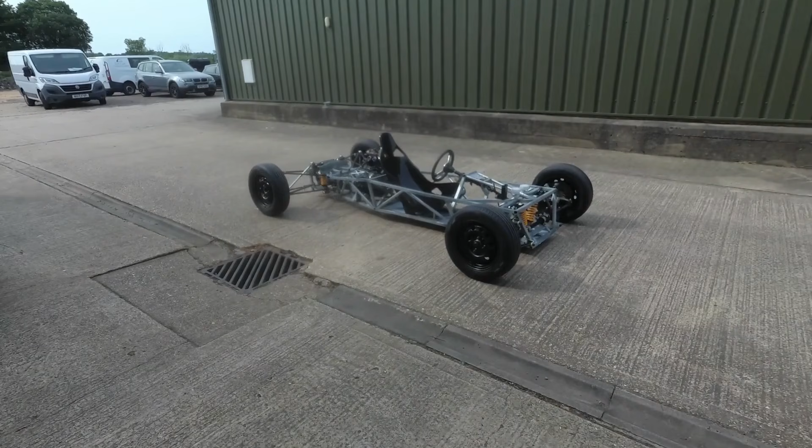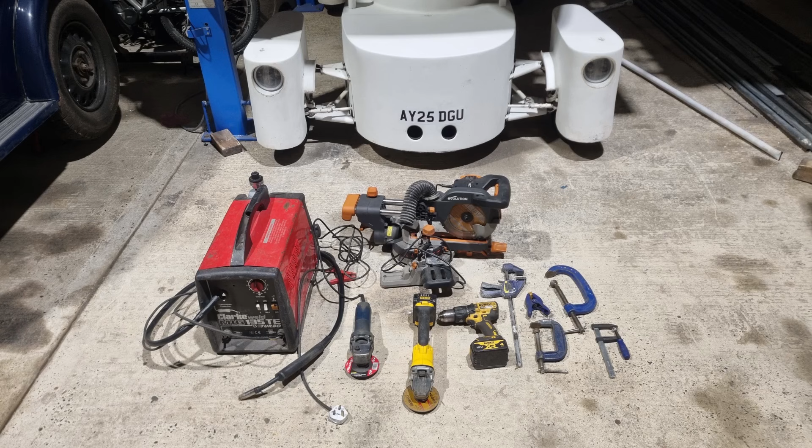In this episode, we're going to start building the chassis by fabricating the front panel, as well as the rear subframe. These are a good starting point, as it doesn't require a large amount of space or money to make them, and is a good lesson for beginners in marking, cutting and welding steel tubing. The tools used are a MIG welder, a chop saw, angle grinder and various hand tools.

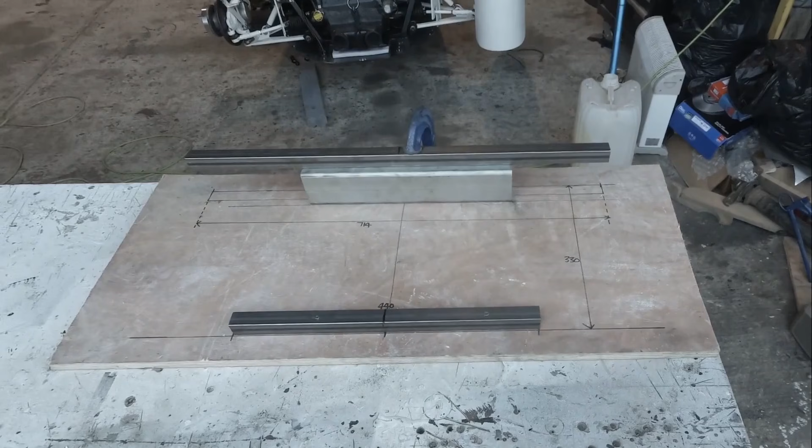For this stage, a very simple jig can be made to hold the tubes in position. One piece of 25 by 25 tube is cut to 440 mm and one to 714 mm. The tubes are placed 330 mm apart from outer surface to outer surface, and the longer tube is raised 75 mm above the work surface. The tubes can be clamped in position or drilled and screwed to the work surface.

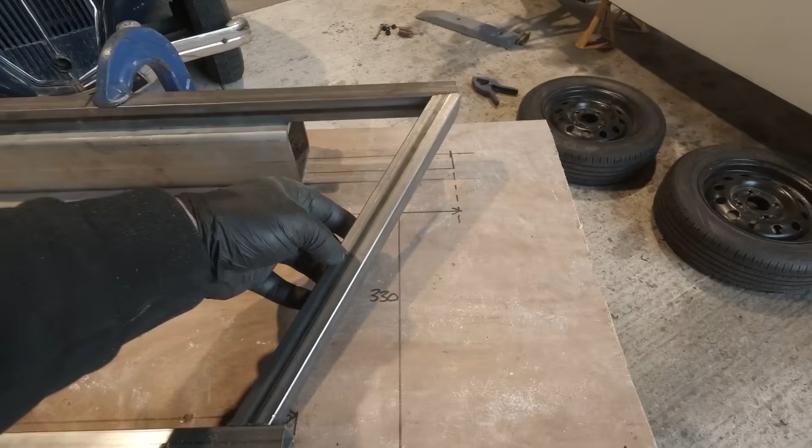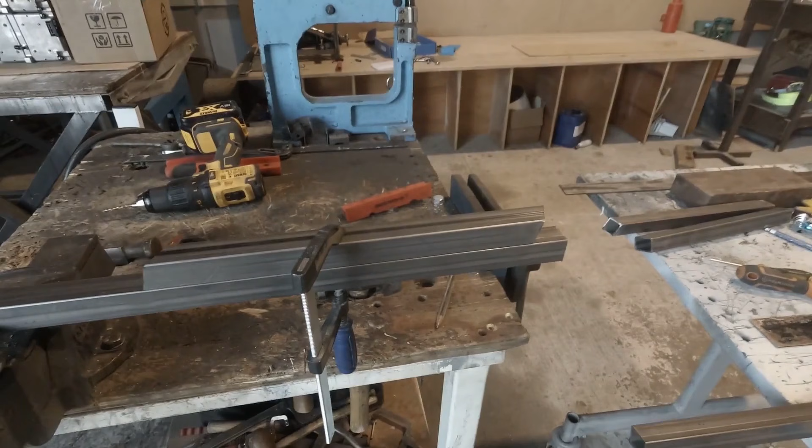After checking the tubes are secure, central and parallel to each other, the side tubes can be placed up to mark and cut. This is quite tricky as the tubes will need to be angled in two directions and may take several efforts. This one has been trimmed too many times now, so a new one will need to be made. A slightly longer tube will need to be cut now to try again. Using the old tube as a pattern will make it much easier to cut one slightly over size.

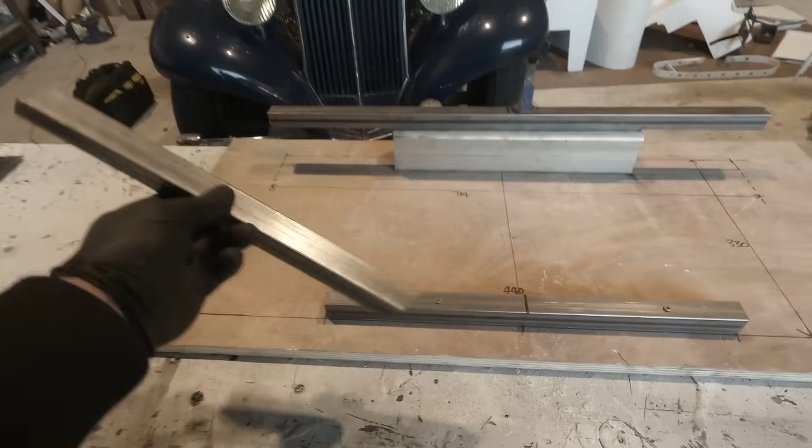Once happy, this tube can, as before, be used as a template to make the other side, after which the tubes can be set up for welding. For this earlier chassis, I've set up a similar jig and used clamps, magnet clamps, and what appears to be a suspension arm and hub to secure the tubes.

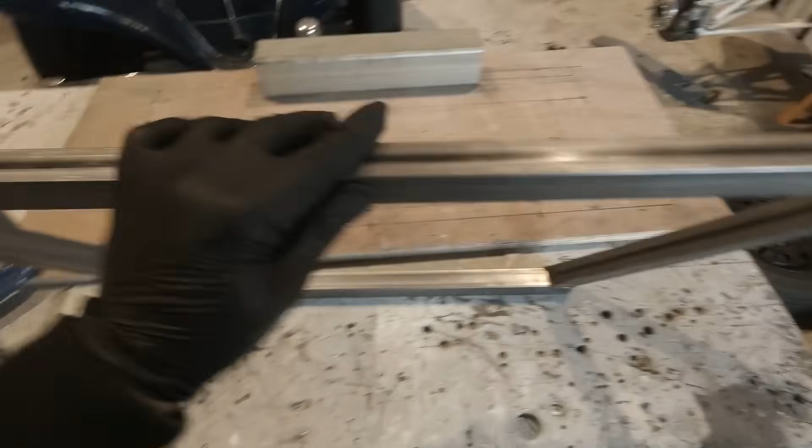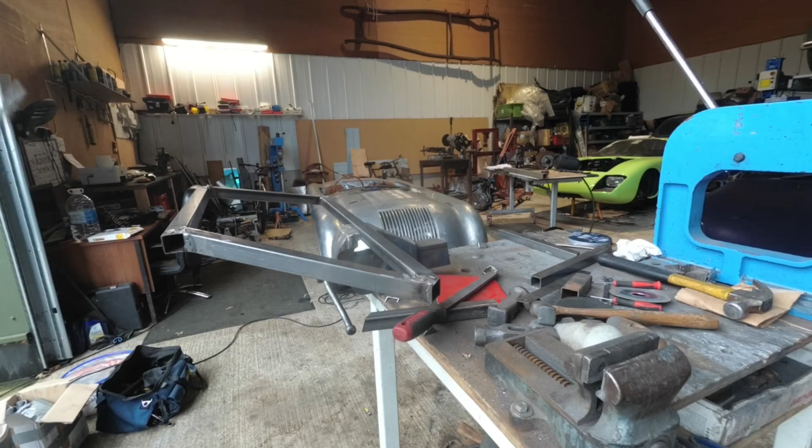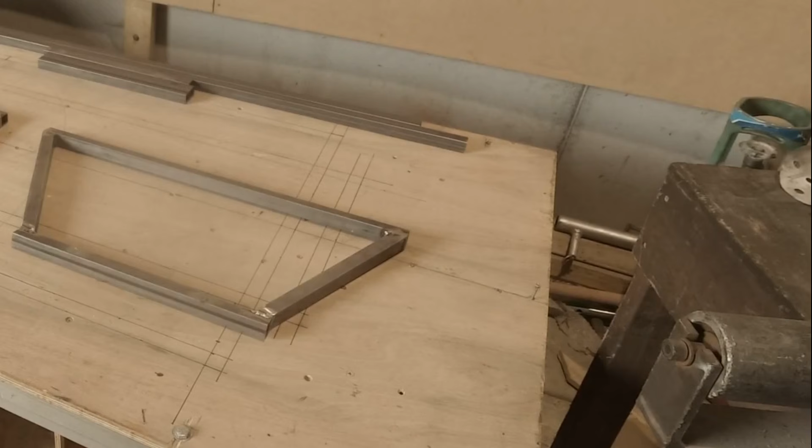Once tack welded, thoroughly check the frame is straight and accurate before adding more spot welds. Heat distortion can be a major problem here, so I tend to build up a series of spot welds and short welds on one join before crossing to the opposite side and working around the frame, with several cooling down gaps in between. And once finished, the frame is thoroughly checked over again and welds ground down. And now the frame can be put aside for the moment.

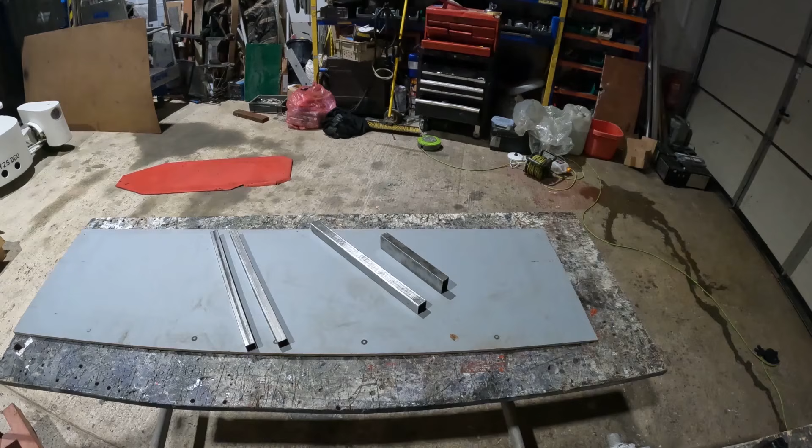The next stage is the rear subframe. We're going to start by building the top frame. Two pieces of 25 by 25 tube are cut to 475 mm length. You'll also need one piece of 30 by 30 tube and one piece of 50 by 25 tube, which are cut to 450 and 250.

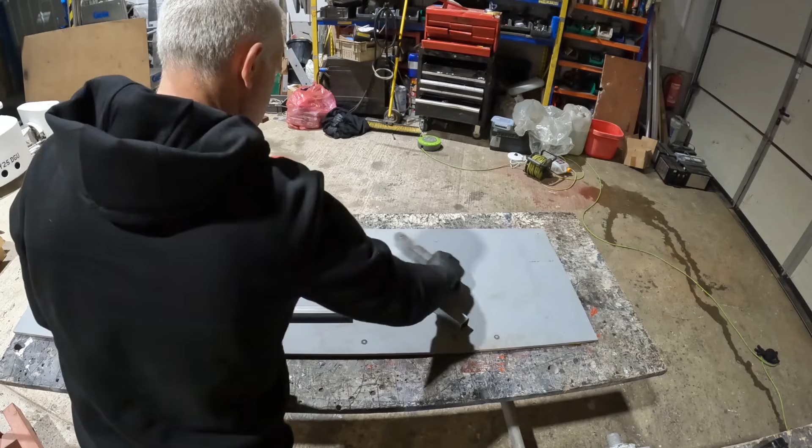The two 25 by 25 tubes are laid flat on the work surface, parallel to each other and 100 mm apart. The tubes are clamped and the 50 by 25 tube is placed centrally on one end and the 30 by 30 on the other. After careful checking, the tubes can be spot welded. Next, 4 uprights are fitted. Two 240 and two 175mm lengths of 20 by 25 tube are positioned as shown.

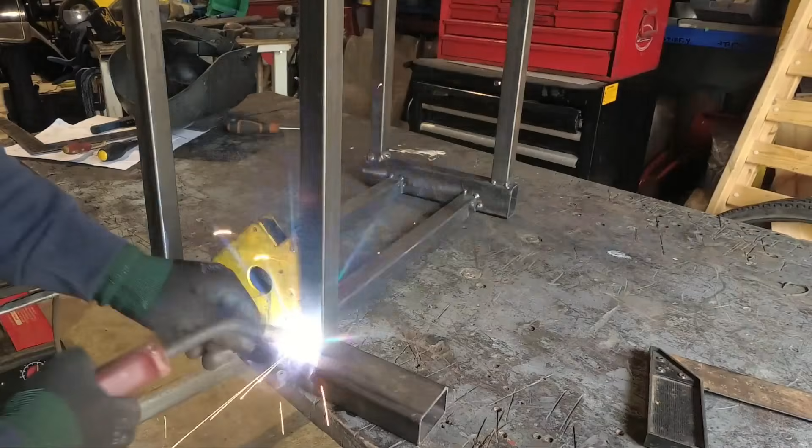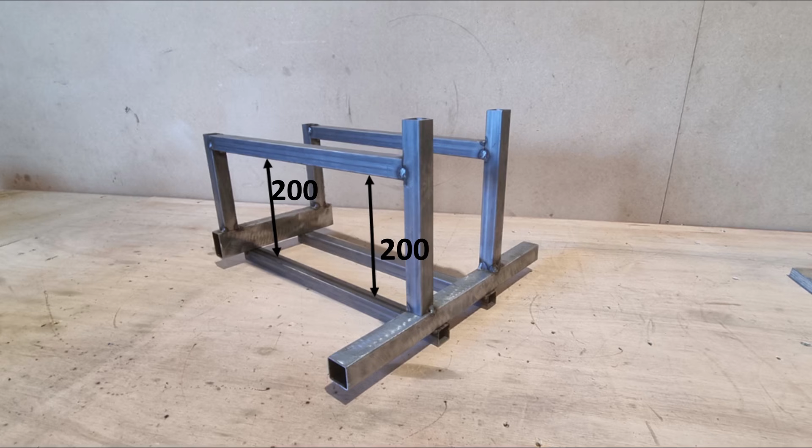When happy that all is straight and true, the bottom rails can be fitted. These should be parallel to the top rails and 200mm between inside tube faces and are angled slightly. Next, the lower section can be boxed in using 2 pieces of tube as shown. That completes the outer box, as it were, and the differential mounts can be added now.

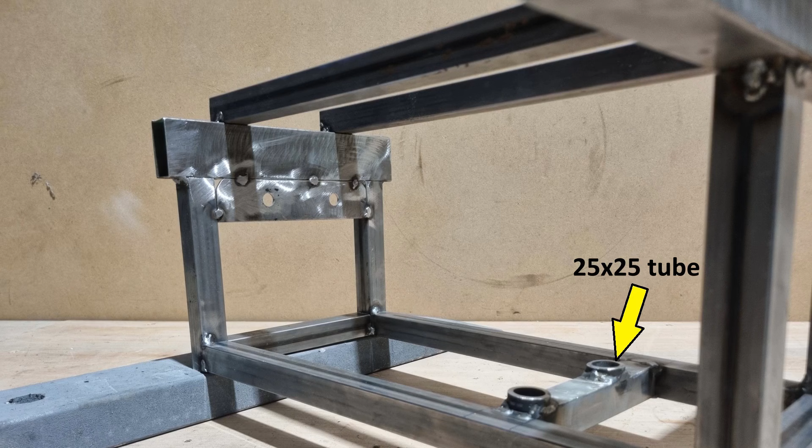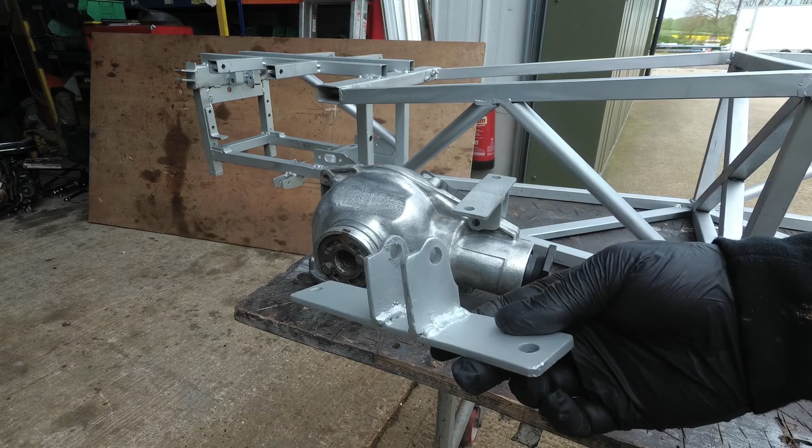Displayed here are the Subaru mounts, which are easy to fit. There's some 3 by 40 wide steel strip cut to length, and some 25 by 25 tube with inserts added. This is quite a simple installation, however the Ford differential is a little trickier. Two brackets are made to fit the front of the differential, and there's an extra fixing for the rear. The rear mounts are made from 2 pieces of 25 by 25 tube cut to 60mm with 2 10mm inserts.

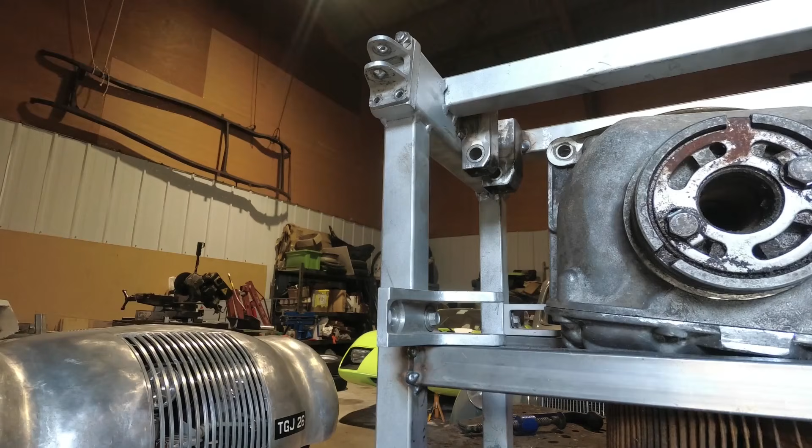For the front mounts, 10mm inserts are added. The centres for the inserts can easily be marked up after the rear mount is fitted. And the top mount goes above.

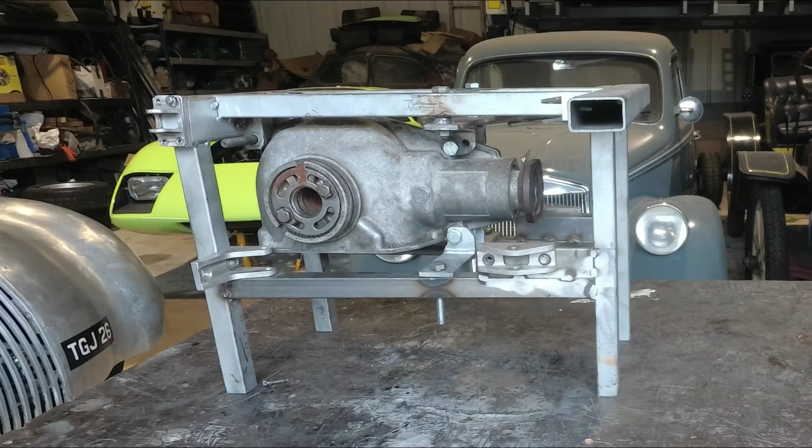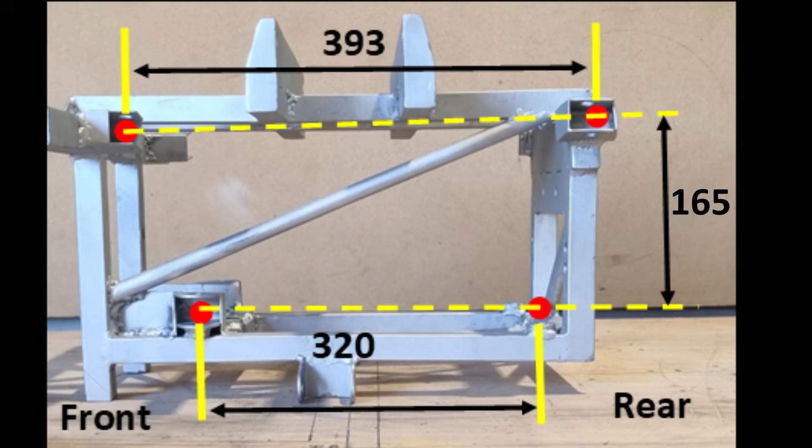Suspension mounts are next. All the dimensions required are in the build manual. So long as your upper wishbones are around 393mm wide and lower ones 320mm, they should fit. All the suspension mounts can be moved up or down or side to side by 25mm or so. The width measurements are shown here. There are 2 choices for the mounts: to use the original Formula Ford aluminium mounts, which can easily be swapped over or adjusted with spacers, or you can make them out of steel.

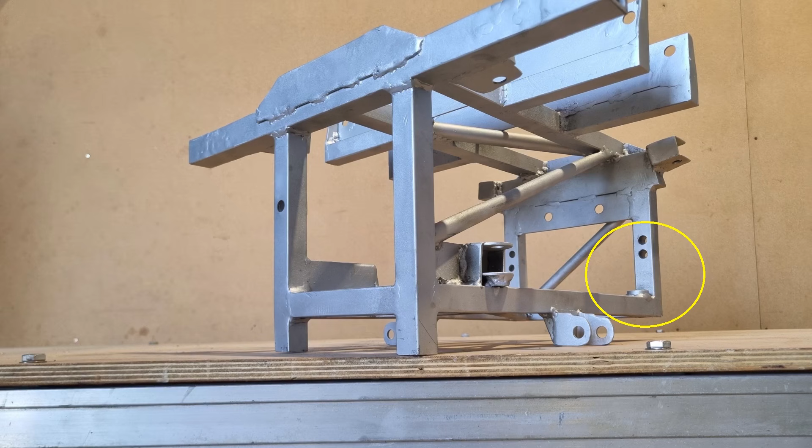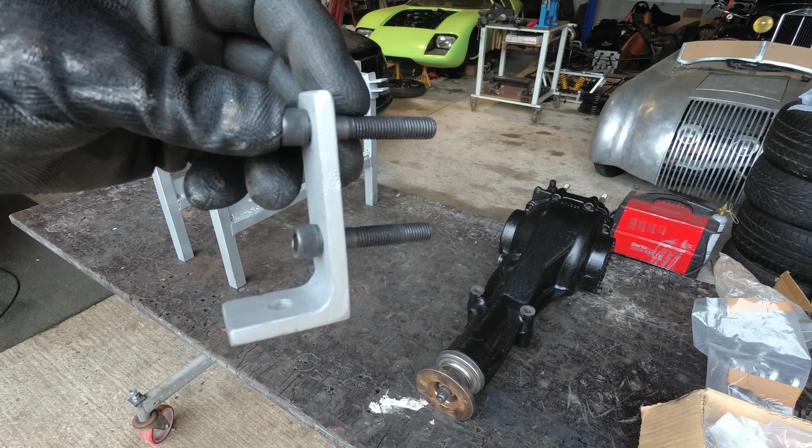This may appear quite a daunting task, but once you have one fixed point, the rest flow quite easily. A good place to start is the lower rear mount, which is connected to the subframe by two 10mm inserts. An L-shaped bracket is made from an offcut of 6mm steel angle. The suspension bolt centre is 25mm from the rear face of the bracket. There is also a 10mm thick spacer that sits under the bracket. You'll also see that there's room for inserts and spacers to fit around the rod ends or rose joints.

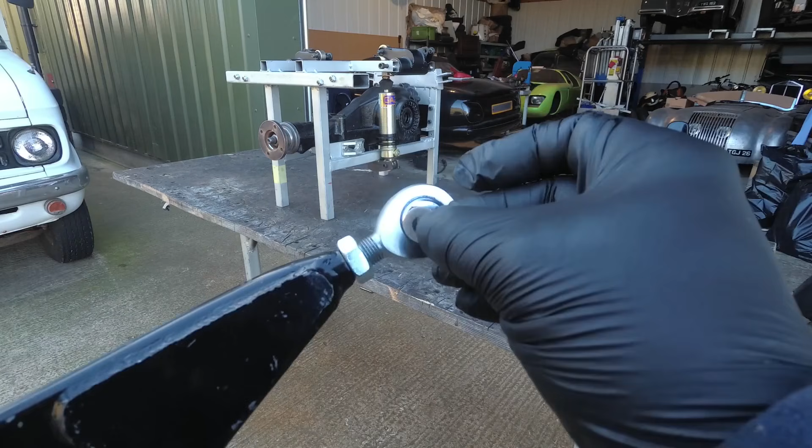With the rear mount fitted, the exact position of the front can be marked or checked. The front lower mount is a piece of 3x40 steel strip. Extra bracing can be added to the mounts later on. The original alloy mounts can be used, or steel mounts fabricated. The mounts can be checked to ensure that they are both level and 102mm from the centre line, as well as the wishbones checked for free movement.

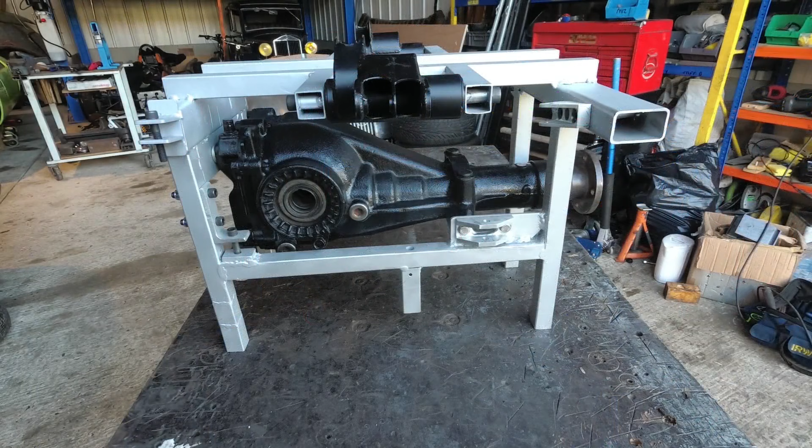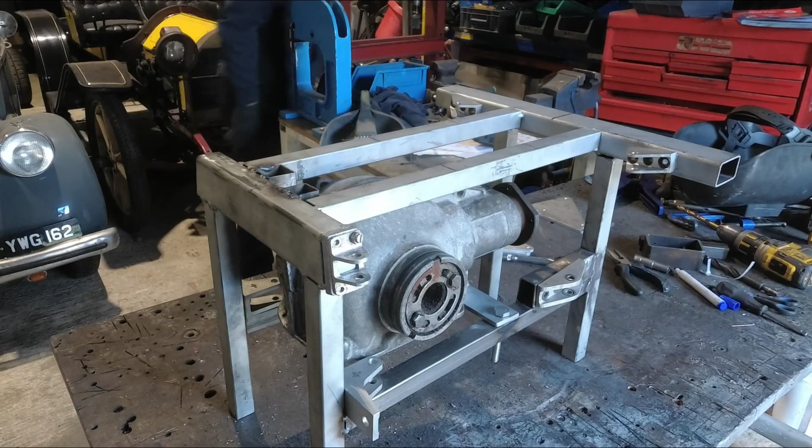The upper mounts are angled upwards as shown. In this case, an alloy mount can be fitted via steel mounts, or a steel mount is easy to fabricate. Here you can see the ends of the 50x25 tube are cut to an angle to match the original wishbones. And here you can see the upper front mounts that are bolted to the frame via 8mm inserts.

The upper mounts should be checked that the hole centres are the correct width, and also 280mm apart side to side, as well as for wishbone articulation.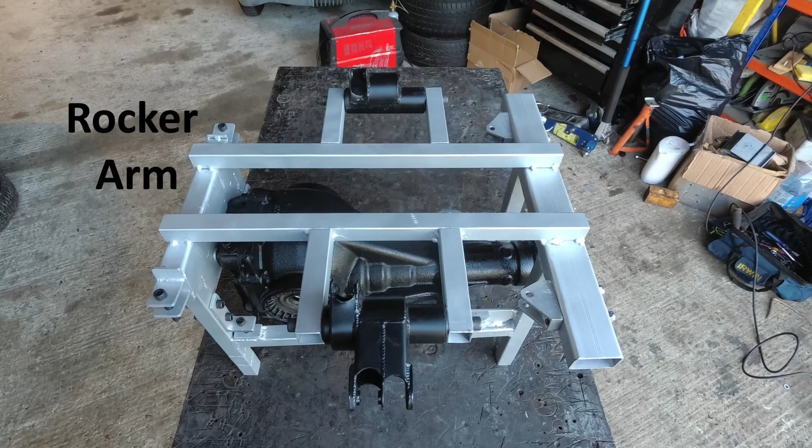Next, the suspension rocker arms can be fitted. These are mounted using 4 pieces of tube cut to 145mm. This will replicate the original setup. The tubes are lined up as per the build manual, or can be changed to match other setups. There's plenty of side-to-side movement available.

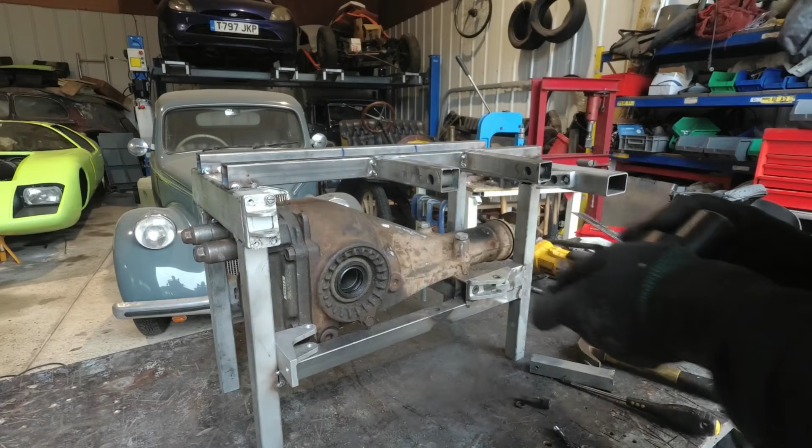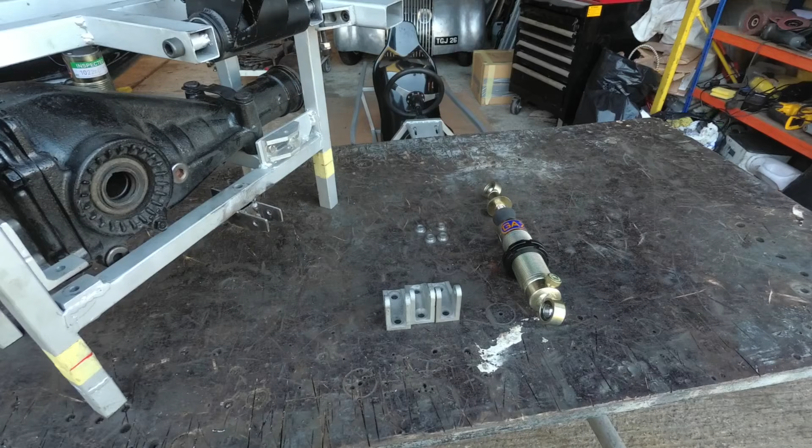I've added 10mm to the width of the mounts to allow for spacers and some side-to-side adjustment. These are the original lower alloy mounts. And this is the steel mount that I used. The tube inserts in the middle here are for the Ford differential mount.

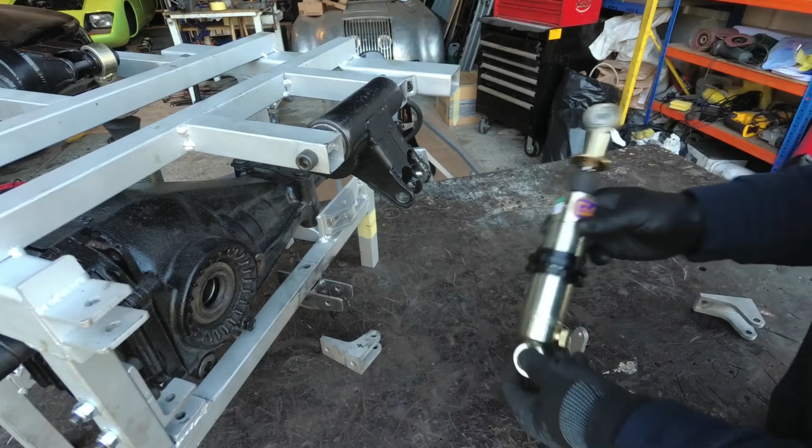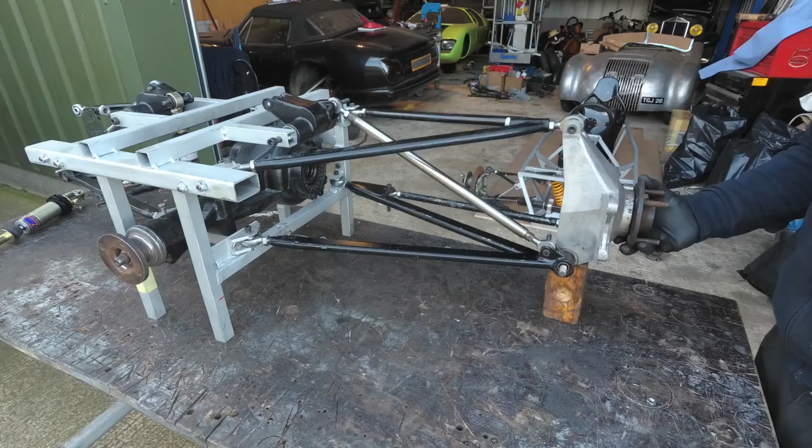The coilover and wishbones can be added now, along with pushrod and rear hub. With the coilover removed, you can check for full suspension articulation.

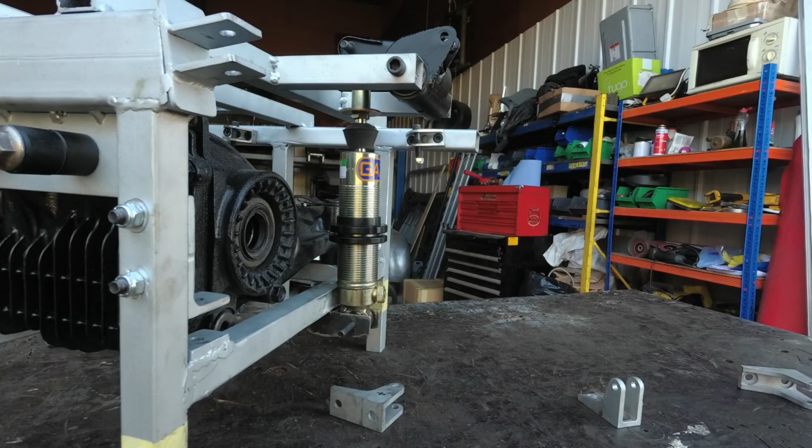I've fitted the rocker arm a little low to aid with the mock-up, so need to raise it by 50mm. Some cross bracing will be added later to add strength. This should work with most rocker arms, or you can make your own.

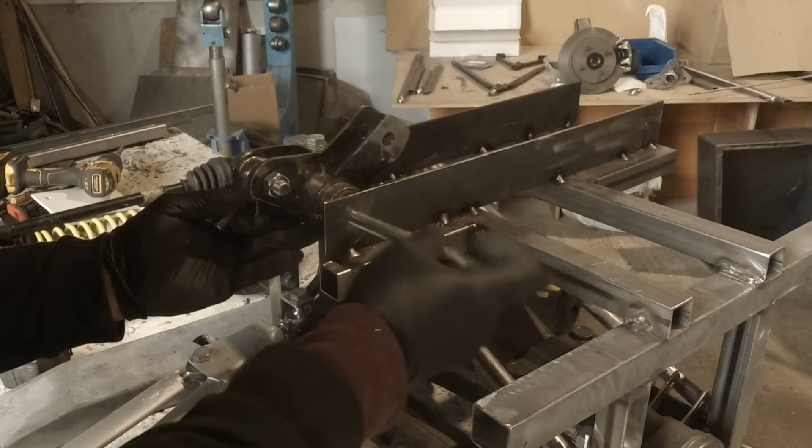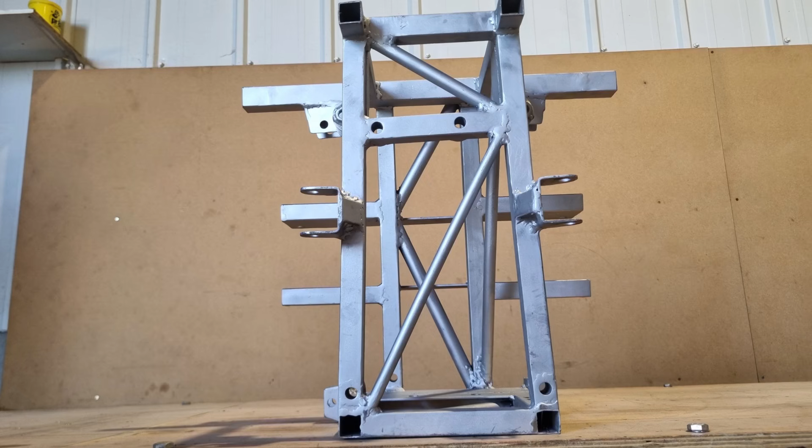Diagonals are also added using mainly 19mm round tube. It's a tight fit, so these need to be added whilst the differential is fitted to avoid clashes. And on one side there's a removable brace fitted to the subframe by two 12mm tube inserts. This is to allow for the differential to be removed.

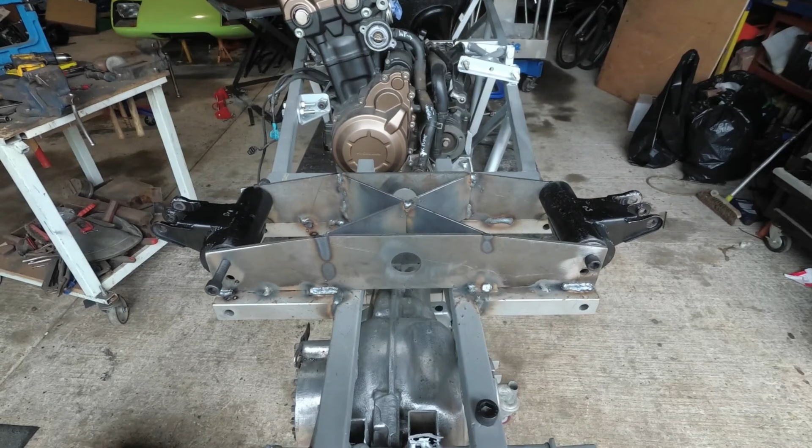And here's the completed cross brace for the suspension rocker arms. And there you have the main structure complete. Check all the measurements and tubes for straightness, and take great care to avoid heat distortion when welding it all up. If you can complete this challenge, the rest of the chassis won't be a problem for you.

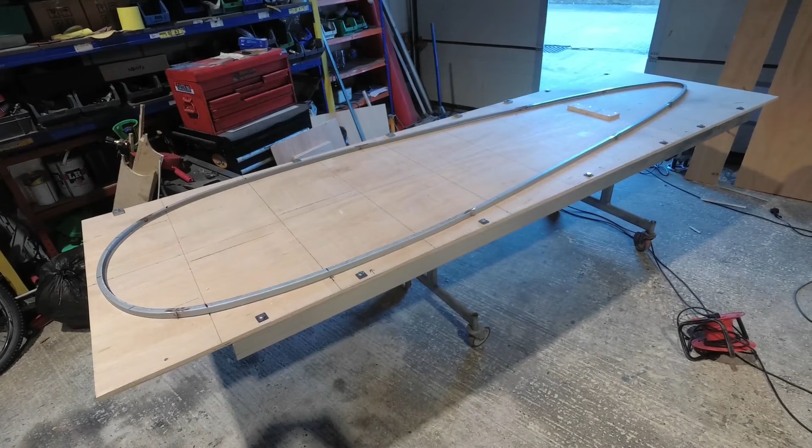For the next stage, a good flat surface is required. I've combined my chassis table with bodywork buck, which keeps the chassis side rigid and flat. I've marked out a centre line and also the outline of the lower tubes as per the chassis dimensions, and lined up the rear subframe.

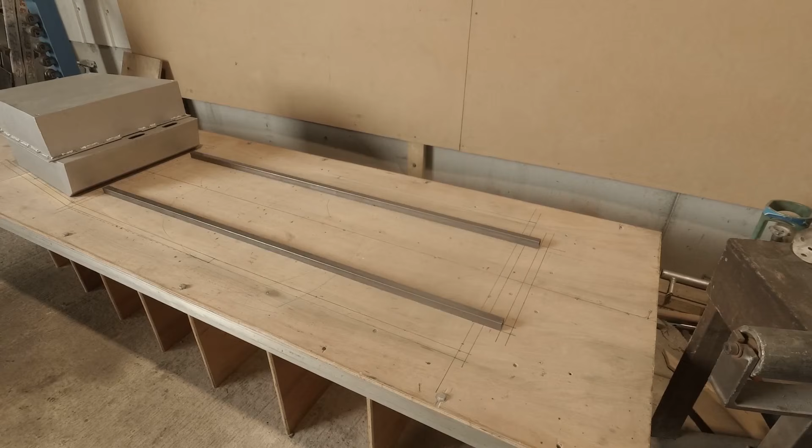Two tubes are cut to 1610mm and laid out, along with three 390mm tubes, and tack welded in place. The tubes can be clamped in position using clamps across the table, along with angle and magnet clamps. The front panel can now be offered up and tacked into place, followed by the rear bulkhead.

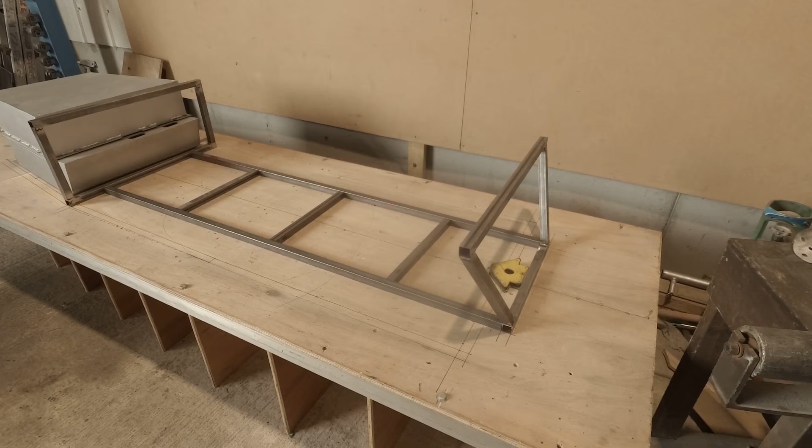Now the rear bulkhead shown here is for my electric version and has a larger engine bay. If you're intending on fitting a larger engine or motor, then this is the point at which you can diverge from the plan. There's an extra 70mm or so available either side using the standard bodywork. For our purposes, the rear bulkhead is as per the chassis dimensions and this photo. The top tube cut to 564 and the lower one to 440, and diagonals added.

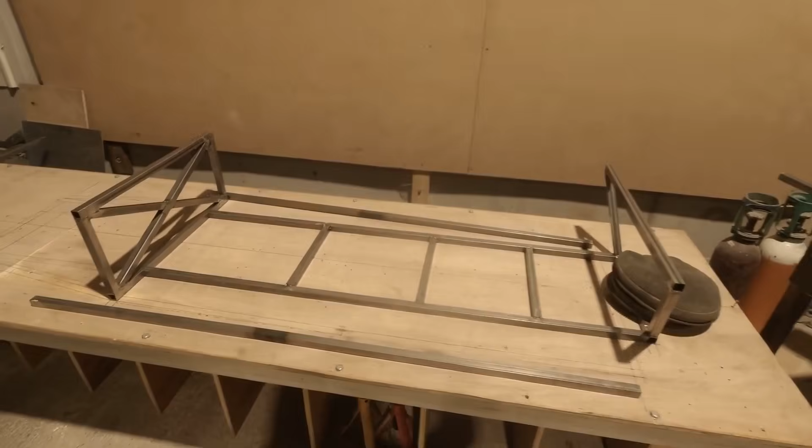The two upper side chassis tubes need to be prepared next. These are 1660mm long and have a small bend of 5 degrees as shown. This can be bent using a tube bender or by heat. In order to mark up the top tubes for cutting, some temporary support tubes can be clamped in place.

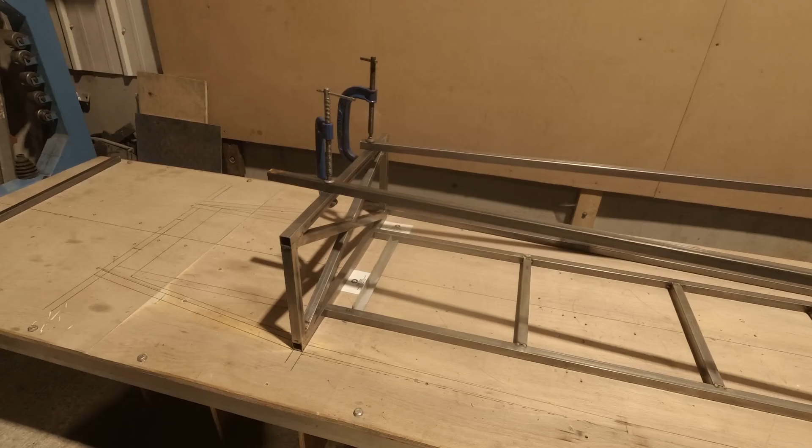Carefully check all tubes are straight and true, and then mark up and fit the tubes between the top corners of the front and rear panels. With the outer box complete, the suspension arm mounts and diagonals can be fitted. Firstly, the upright for the suspension mounts, which is fitted as shown. Followed by the other side.

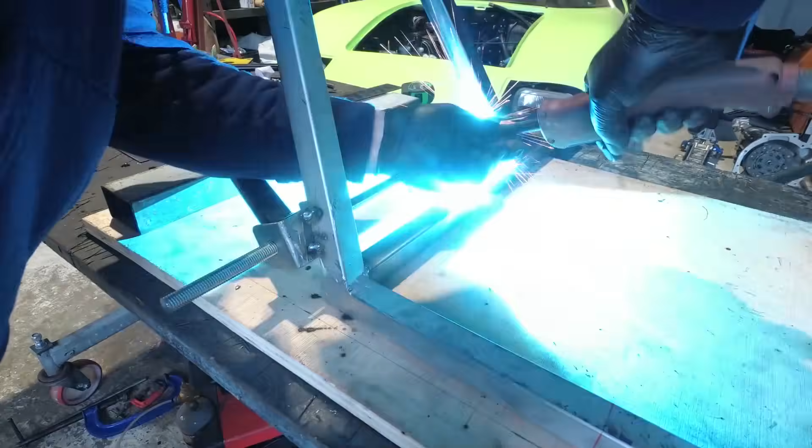The suspension arm, with its bushes and mounts fitted, can then be lined up. The centre of the mounts should be 48mm above the floor. The upper arm centres are 232mm from the floor and will need careful positioning.

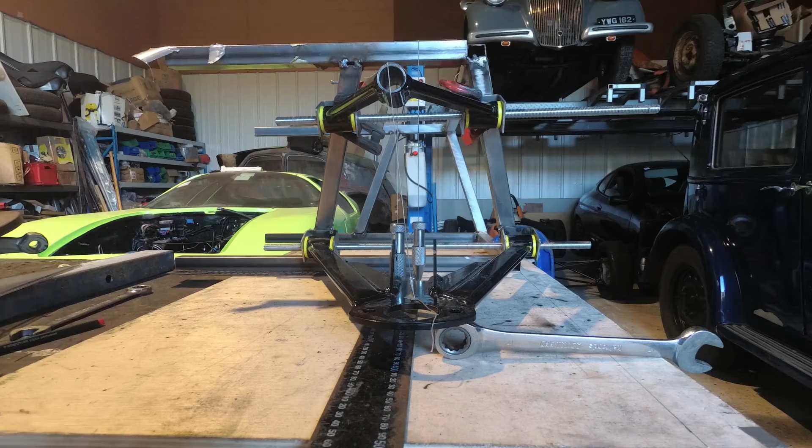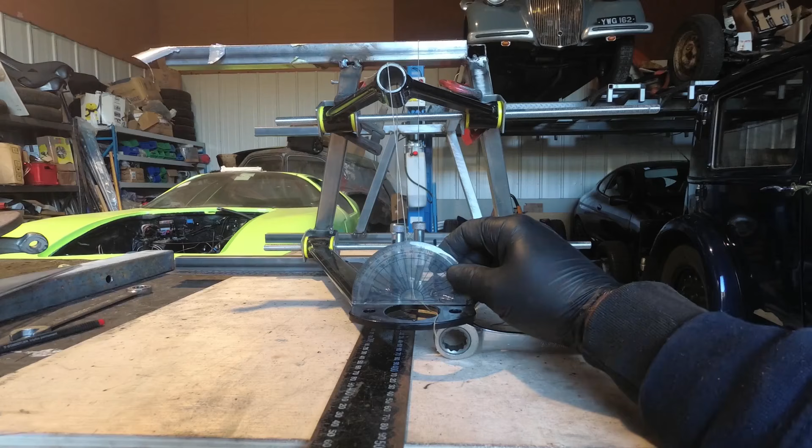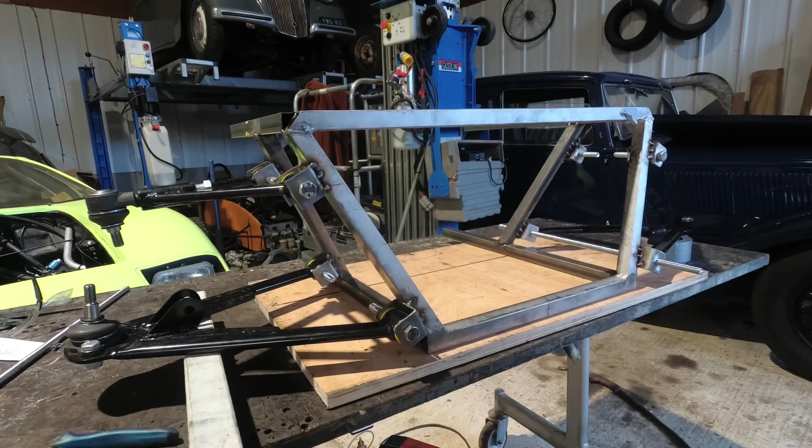The top wishbone should be positioned rearwards slightly to allow for caster. The centre of the top wishbone should be around 10 to 15 degrees behind the lower one. Once happy, the upper mounts can be tack welded. A straight tube can be used to check that all the wishbone arms are fitted straight and true.

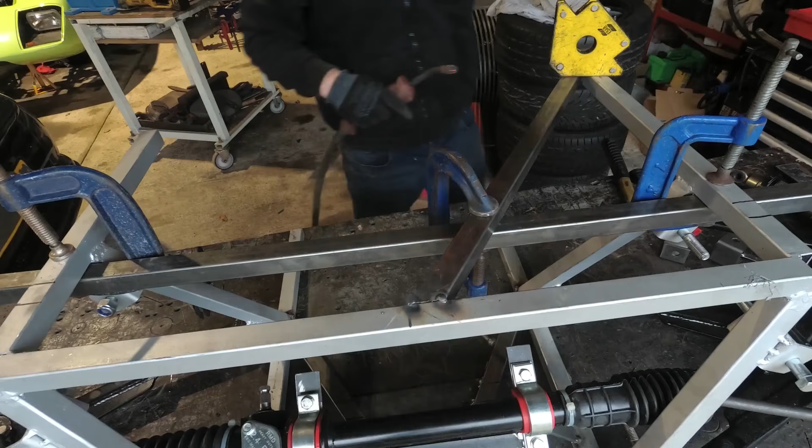The steering rack can be positioned next. The top bolt hole is about 95mm from the floor. Some sides and a centre support are also added. The upper diagonals are added next. The temporary brace that has been clamped in place here is just the right position to help mount the suspension rocker arm mounts.

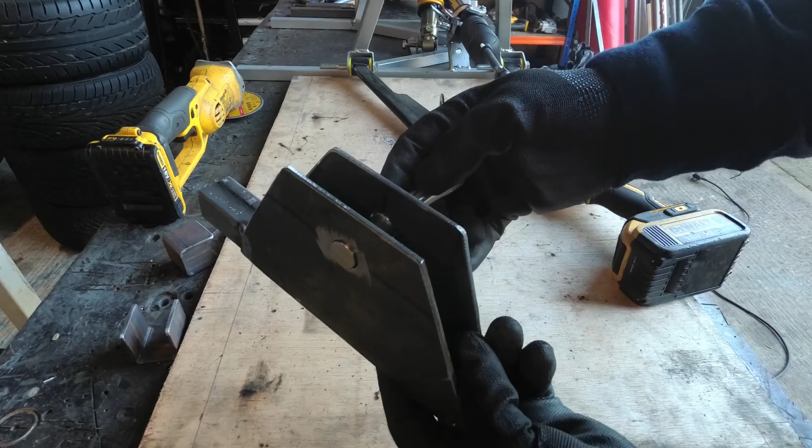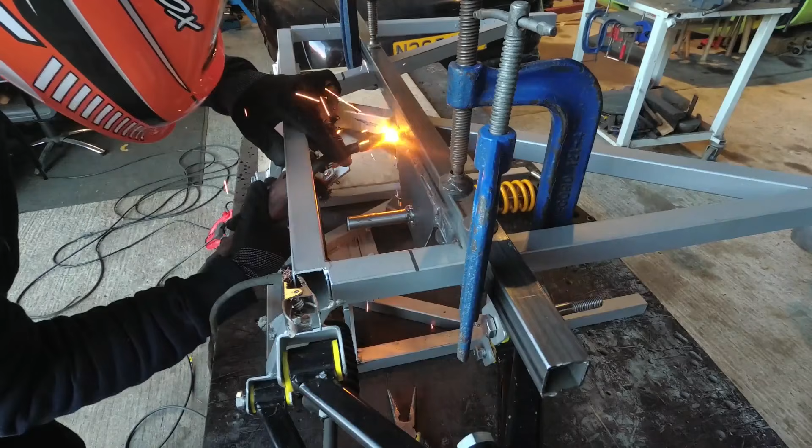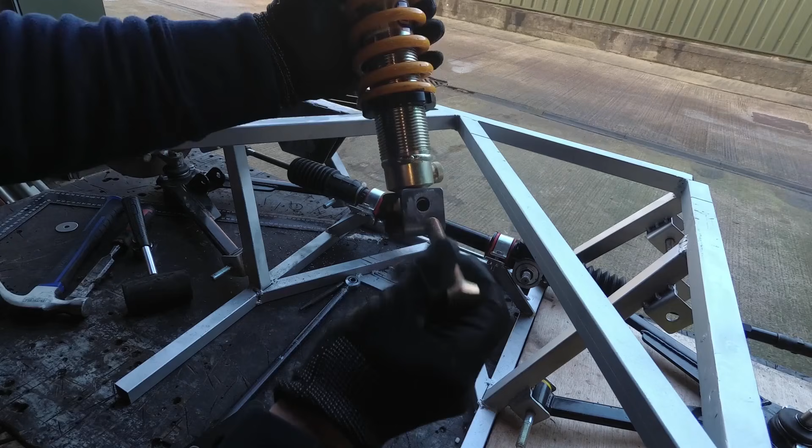The tube should be 127mm to the outer edge of the front tube. The bearing can be secured by using a dot punch, and the rocker arm can be tapped on afterwards. The coilovers can be positioned correctly now, along with the lower diagonals and the base plate.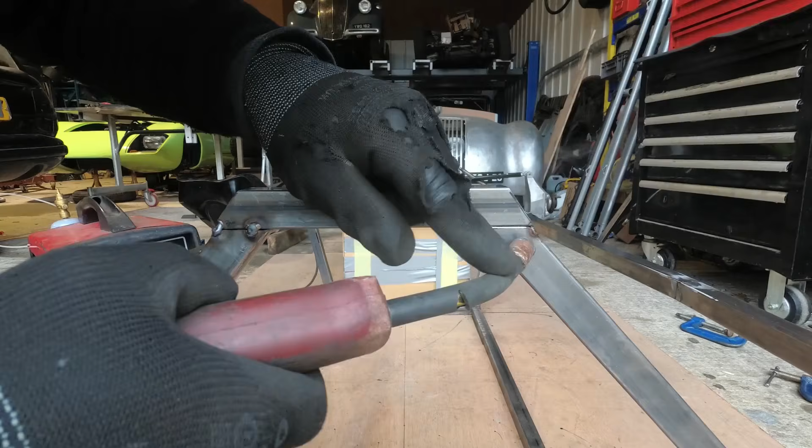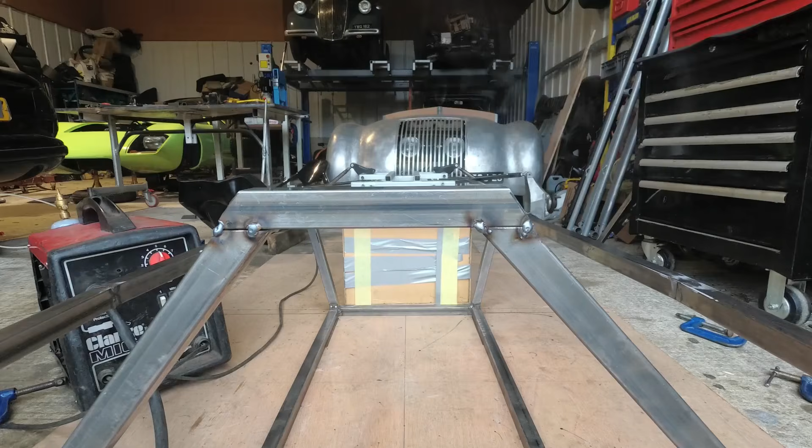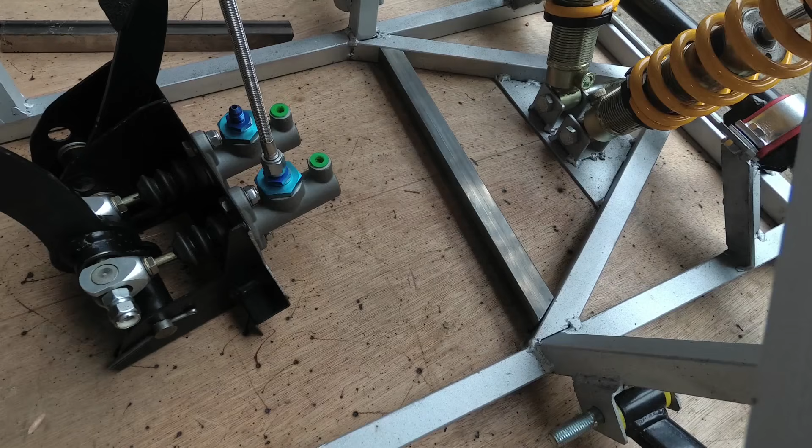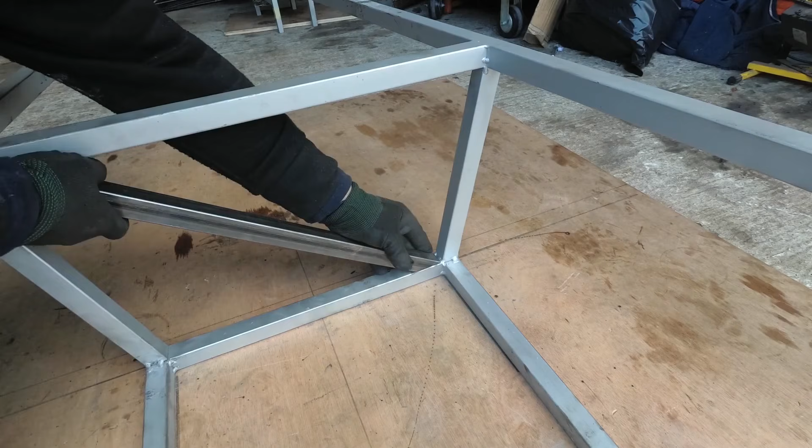For the steering column structure, some 19mm diameter tubes are used. A mount is also fitted for the rear of the steering column, and a tube added for the brake pedals. Components can be fitted, and all measurements should be double checked before diagonals are added. These are 22mm diameter tubes. Round tubes are much easier to cut and fit as diagonals than square tubes in this case.

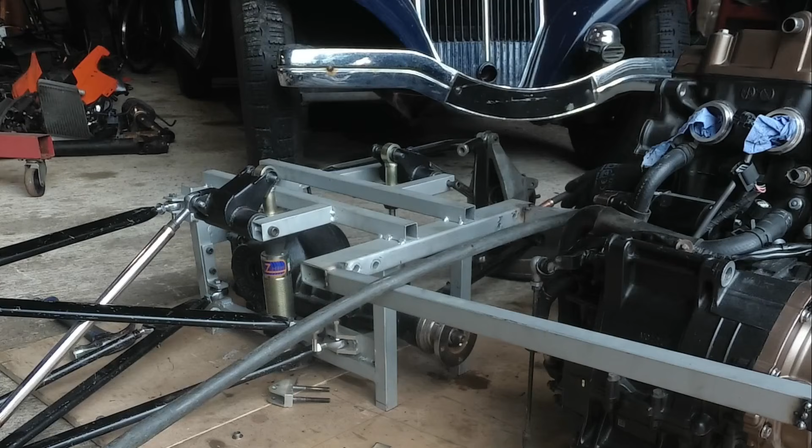The chassis can now be linked up to the rear subframe. If you are fitting a different engine, now would be a good time to check it all fits, and if necessary, extend the engine bay and chassis. With the subframe and chassis carefully aligned, four 700mm tubes are cut and lined up for marking, then tacked into position.

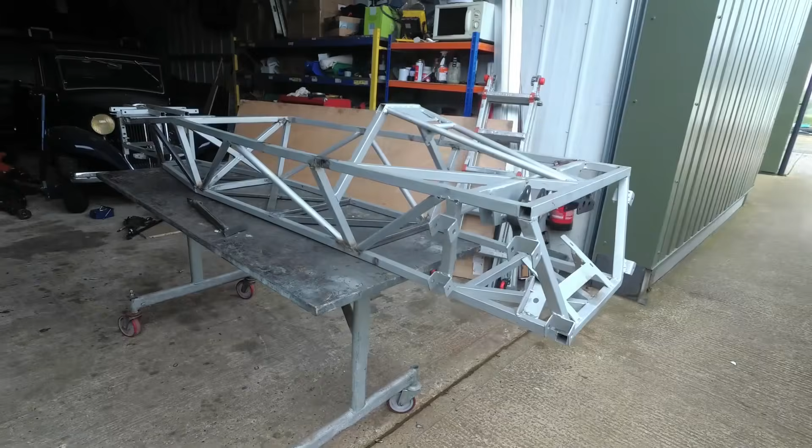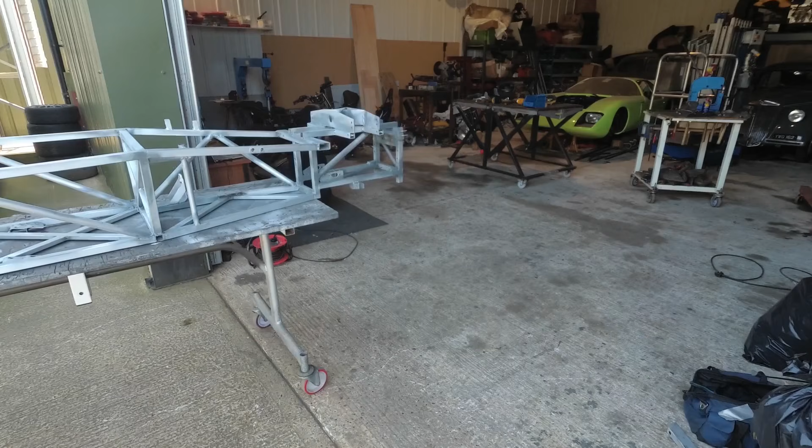Diagonals must also be added to the engine bay to finish it off. Components can be fitted and all measurements double checked before the chassis is fully welded. Again, great care is taken to avoid heat distortion. The main structure is complete now and ready for parts and components to be added.